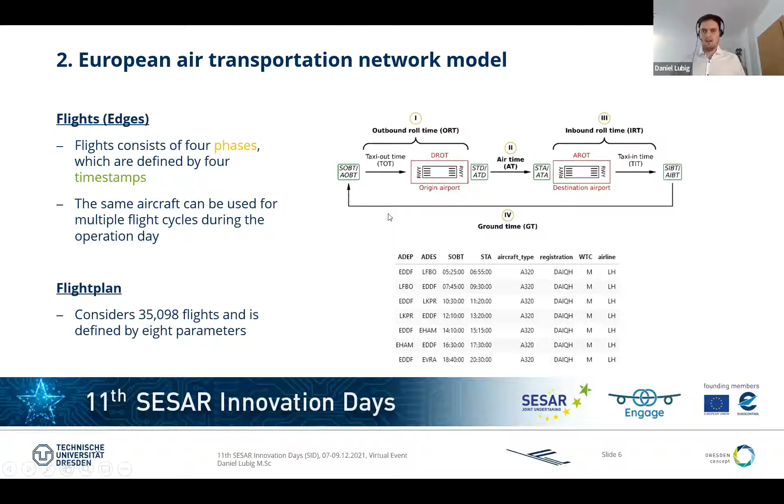So we all know our 4 phases for a flight. And now the question is, how long do these phases take? Let's start with the flight time. Within the data set, the actual flight times are reported. I will show you the flight times from London Heathrow to Frankfurt, which was flown with an A320neo aircraft, because it's important to consider the aircraft type. As you can imagine, different aircraft types have different speeds, and this affects the flight time significantly.

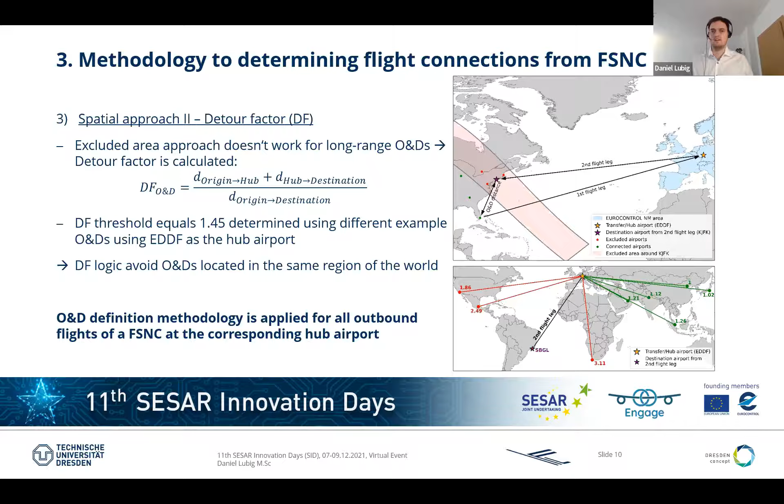Okay, we have our simulation, then we need to start the machine. I talked about the flight plan, so I skipped this part. We defined scenarios. The baseline scenario doesn't consider any capacity improvement. Scenarios 1 and 2 consider the capacity improvement at Frankfurt and at London Heathrow. And then we are checking 5 key performance indicators. For the airport performance, inbound delay, outbound delay, additional taxi out time, and the ASMA additional time. And for the full service network carrier, the connection rate, which is the rate between the fulfilled flight connections and the planned flight connections. And let us have a look at the results.

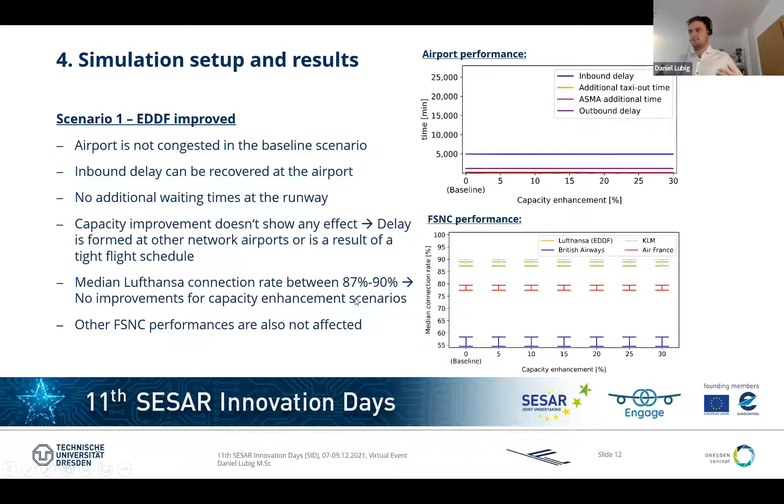So these are the more, I would say, boring results. Nothing happened here. And we can see Frankfurt is not a congested airport. So capacity improvement doesn't have any effect and doesn't improve the full service network carrier connection rate. All in all, this is the typical case of improving a system which is not congested. It doesn't have an effect.

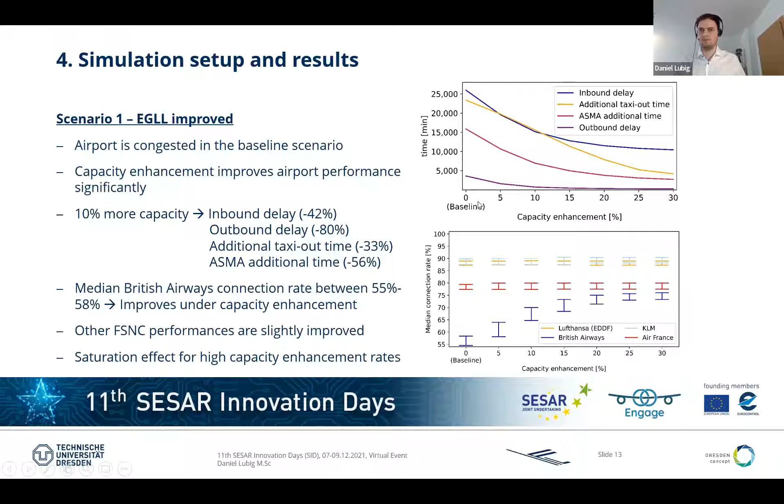Other full service network carrier performances are also slightly improved. It's hard to see here, but for example, KLM can also increase their connection rate because of their flights which are flying to London. They are improved, and these improvements spread a little bit into the network of KLM. In both cases, for the airport and for the airlines, we can see a saturation effect, which means a higher capacity enhancement doesn't have the same effect, especially when you compare this to the lower capacity enhancement.

So I will leave you with a short conclusion to answer the research questions. At first, the capacity improvement leads to airport performance increase if the airport is congested. That's important to state. The same occurs when you are looking at the local full service network carrier, and the performance of full service network carriers using the capacity improved airport as spoke airport are also improved slightly. But I would say the network effects are not that significant or not as high as expected.

So the small outlook: this is a basis to extend the methodology and to include the airline rules, for example, to add a delay cost analysis, or just to improve the European air transportation network model, because some assumptions can always be replaced or can be sharpened.

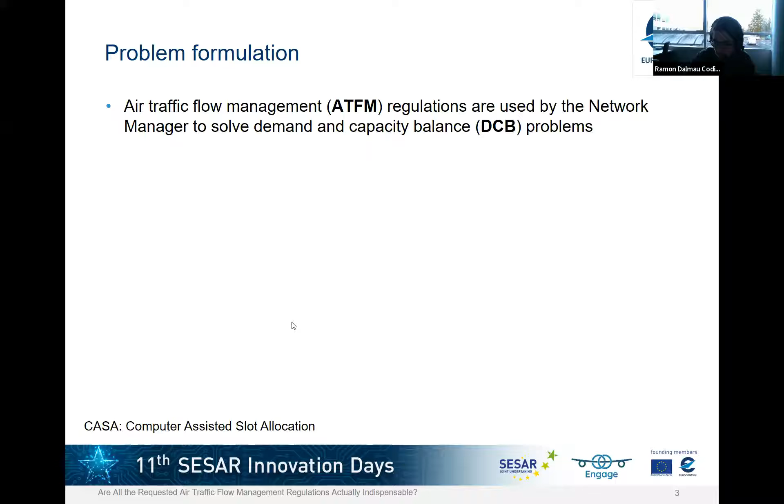So in Europe, the most common air traffic flow management measure used by the network manager to solve demand and capacity balance problems consists of imposing air traffic flow management regulations. In the following image, you can see a traffic volume which is associated with a sector in the southeast of Spain. This figure shows the demand, which are the vertical bars, as well as the capacity, which is the horizontal line along the day.

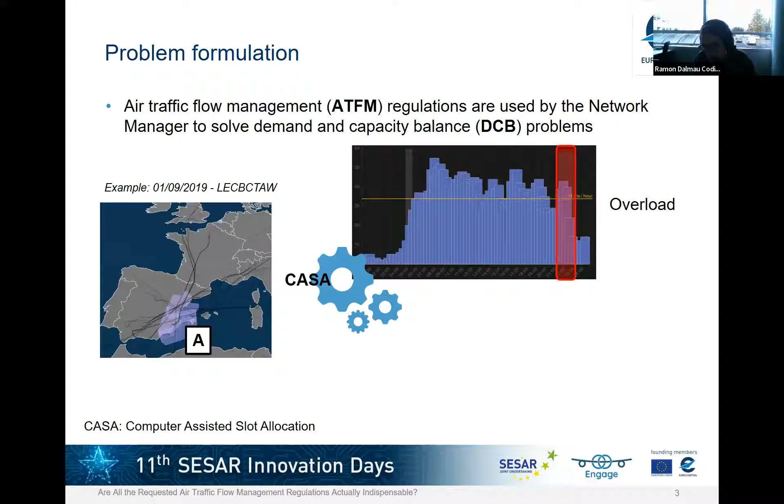In this particular scenario, you can see that the traffic volume was open in the morning and also at the end of the day. And a regulation was put in place at the very end of the day because the demand was above the capacity. Then the computer-assisted slot allocation system assigned ground delays to the flights entering in the time period of the regulation, on a more or less first come, first served basis with some exceptions, in order to smooth the demand. So as a result, the overloads were solved, but at the cost of some ATFM delay.

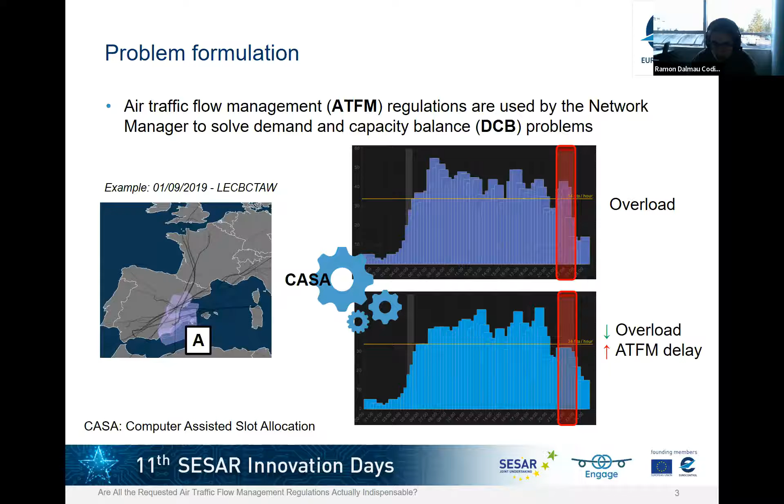When only one regulation is in place in the network, the problem is very easy. But during busy days, especially during summer, many regulations are requested by the flow managers, and these flow managers request the regulations independently. It's the network manager who has the role of coordinating the set of regulations in the network. But a flight subject to several regulations simultaneously is assigned the most penalizing, or the highest delay of all regulations affecting the flight, and then it's pushed into the other regulations with this delay.

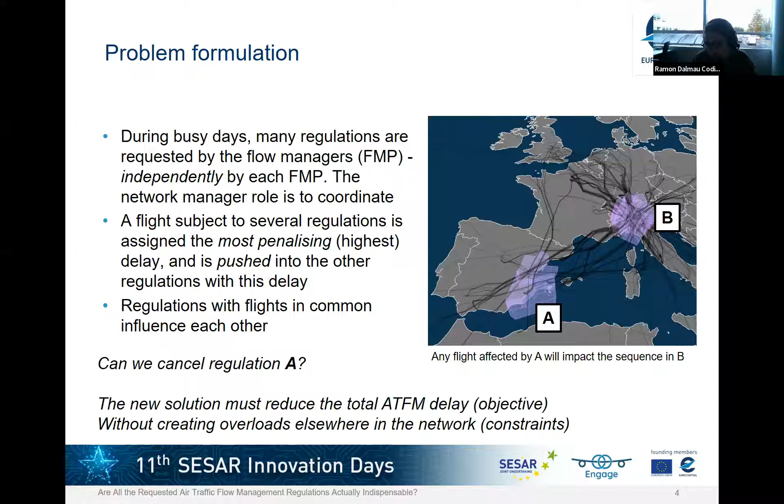But the new solution must reduce the total ATFM delay. This is our objective. But we cannot create overloads elsewhere in the network by removing or canceling regulations, and these are our constraints. So this is a binary combinatorial optimization problem, because we must decide if we keep or remove each one of the regulations that are proposed. With two regulations, there exist only 4 possibilities, so it's an easy problem.

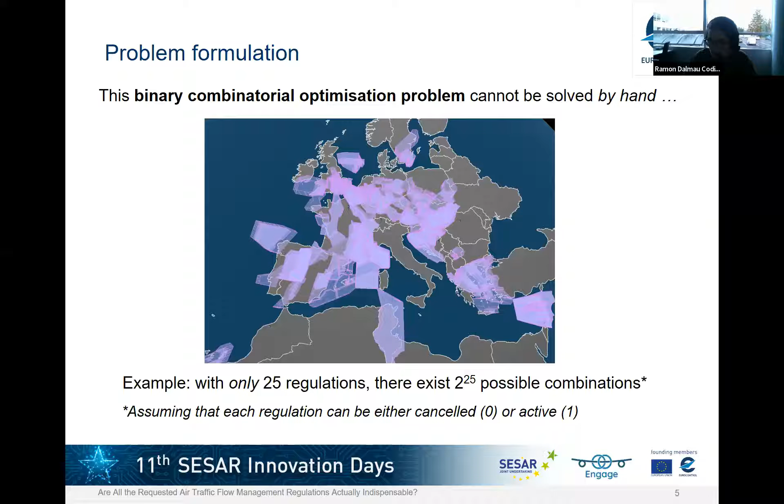But in practice, this cannot be solved by hand, because with only 25 regulations, for instance, and this is quite small, there exist 2 to the power of 25 possible combinations, assuming that each regulation can be either cancelled or active. If we then play with the parameters of the regulation, the combinatorial explodes.

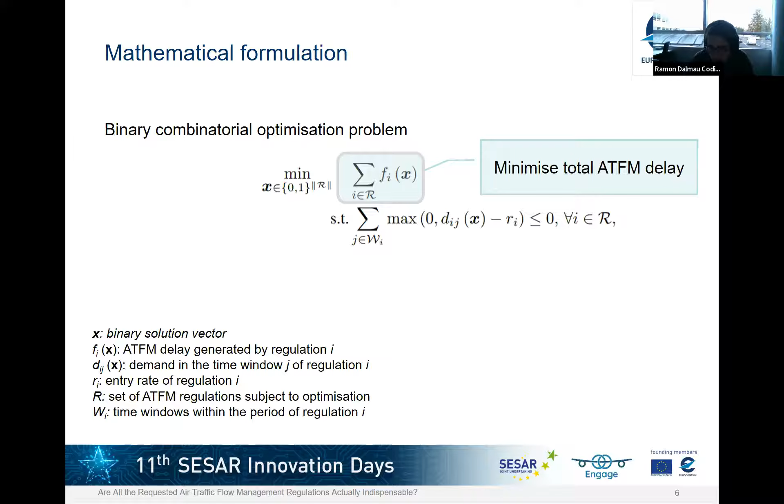In mathematical terms, we want to find the best binary vector, where each element of this vector corresponds to one of the regulations proposed by the flow managers, such that the total ATFM delay is minimized, where the delay created by each one of the regulations depends on which regulations are active, because regulations interact. And at the same time, we must not create overloads by canceling regulations.

And we must keep this to 0. And this is one of the constraints. The problem is that we cannot solve this optimization problem with mixed integer programming because the functions f, which is the delay created by each regulation, as well as d, which is the demand in the time period of the regulation, are very nonlinear functions of our binary solution vector. We cannot model this with linear equations.

Furthermore, if we consider the constraints as hard constraints, even one single overload somewhere in the network will invalidate our solution. But maybe the solution was very good in terms of delay. So we should consider these constraints as soft constraints, not hard constraints. We addressed this binary combinatorial optimization problem as a weighted constraint satisfaction problem, in which we just want to minimize the violations of a set of constraints.

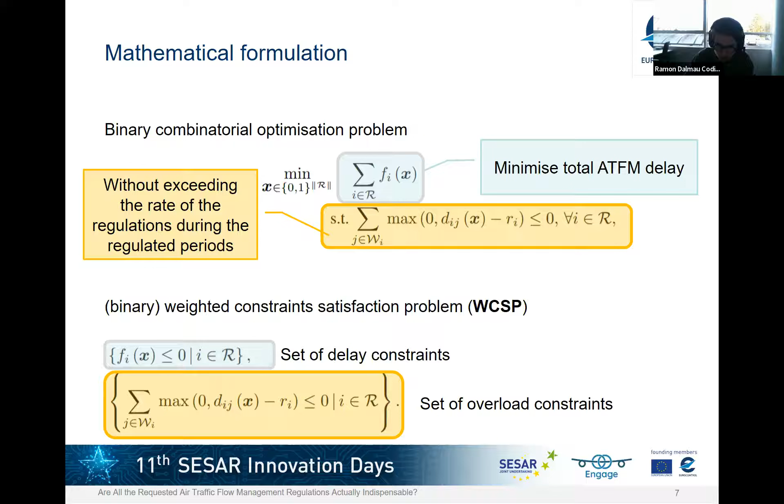In order to accomplish that, we just transform the objective, the minimization of the total ATFM delay, into a set of constraints, which state that the delay created by each regulation must be negative. We all know that the delay cannot be negative, and this is equivalent to saying minimize the total ATFM delay. So now we have a set of constraints composed of 2 subsets, the set of delay constraints and the set of overload constraints, and we just want to minimize the constraint violations. So we effectively transform an optimization problem into a weighted constraint satisfaction problem.

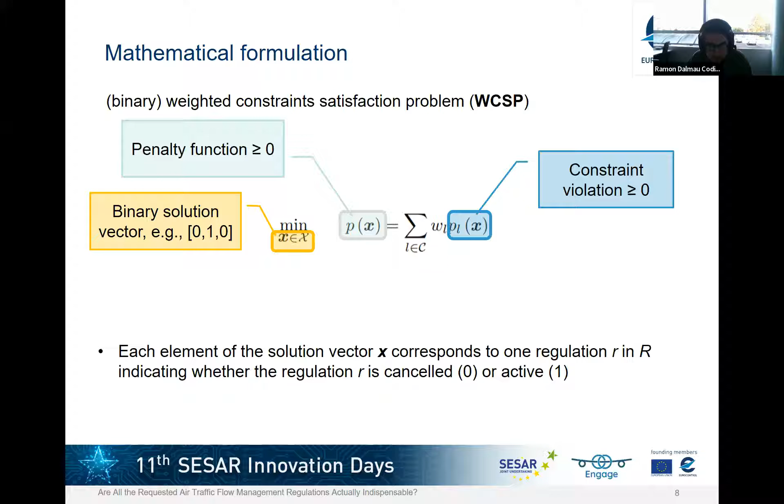Again, we want to find the best binary solution vector where each element of the solution vector corresponds to one regulation, indicating whether the regulation is cancelled, 0, or active, 1, such that a given penalty function is minimized. And this penalty function is a weighted sum of constraint violations, where the weight associated to each constraint indicates the importance of the constraint in the problem, and is a positive value, of course. And the set of constraints include the delay constraints and the overload constraints.

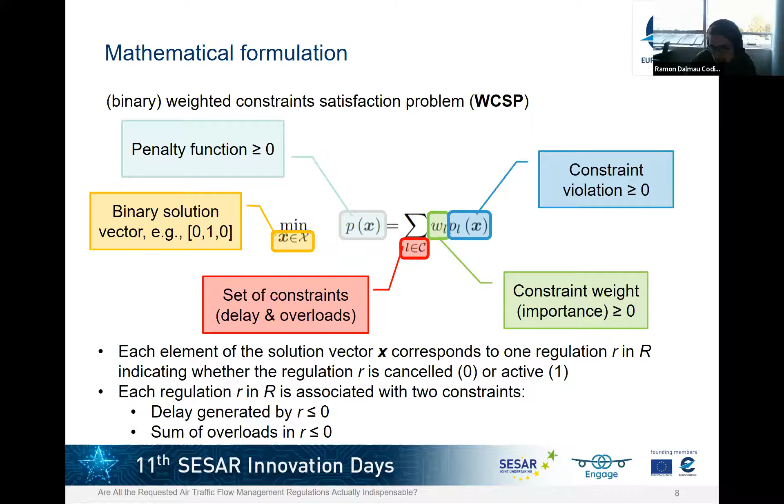And each regulation in the set of regulations that we want to optimize is associated with two constraints. The delay constraint that states that the delay of this regulation must be negative, and we want to penalize those violations, and that we cannot exceed the capacity. So the sum of overloads must be also negative. But now we have new questions. How to set the weight that is associated to each constraint? Because constraints with small weights will tend to be ignored by the algorithm. But too much emphasis will be placed on solving constraints with very large weights.

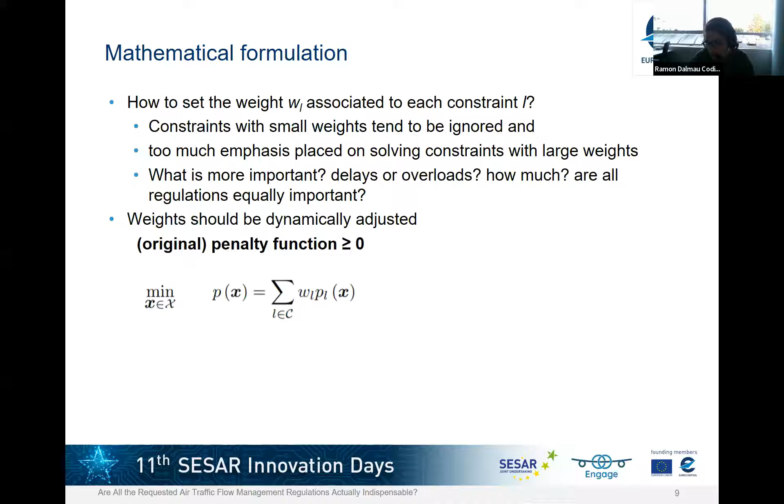Furthermore, what is more important, delays or overloads? We know that overloads, but how much? And are all the regulations equally important? Since we cannot answer these questions, we dynamically adjust the weights during the search, depending on the constraint violations. We'll see this later. So we have our original penalty function, which is the weighted sum of constraint violations, and whose weights are fixed. They are fixed, we cannot touch them.

And we have another function that is the evaluation function, that is the function that we use during the search. Okay, we are trying to optimize this evaluation function, and it is identical to the penalty function, and the only difference is that the weights are adapted. We can change these weights. We dynamically adjust these weights during the search. And these weights are positive, of course, and cannot exceed the original penalty weights.

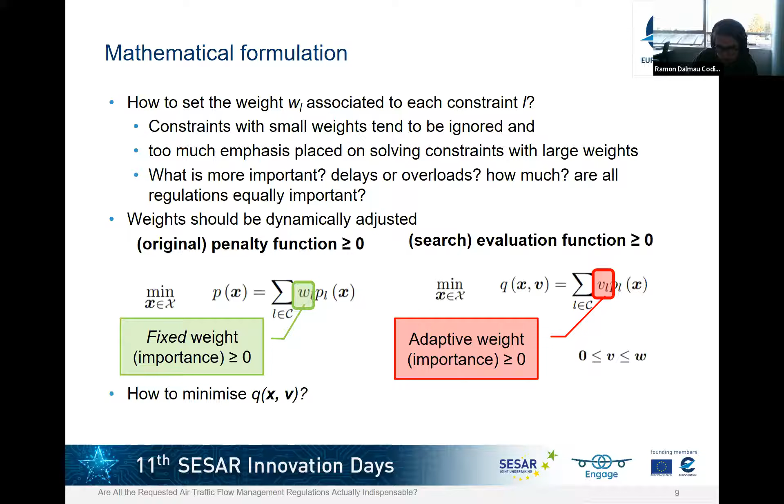But how to minimize this evaluation function? And secondly, and more important, how to dynamically adjust the weights during the search. For the first question, actually any optimization method could work. So you could use simulated annealing, genetic algorithms. In this case, we selected Tabu Search because we tried many algorithms, and this one was providing very good performance. For the second question, we are updating the weights based on the current violations. So if we see a constraint that is highly violated, we increase the weight. Instead, if we see a constraint that is not violated a lot, then we decrease the weight, giving more flexibility to the optimization solver.

You can find more details about the algorithm that we developed in the paper, but in short, we are repeating a Tabu Search round, which is a standard algorithm, in order to update the current solution with Tabu Search, in order to minimize the evaluation function. Remember that the evaluation function is identical to the penalty function, but with dynamic weights. Then, when we find a local optimum, we check if the current local optimum is better than the incumbent, where the incumbent is the best solution found so far during the search, in terms of penalty function, okay? And then we update the weights. Again, the Tabu Search and the penalty weight update routines are explained in the paper.

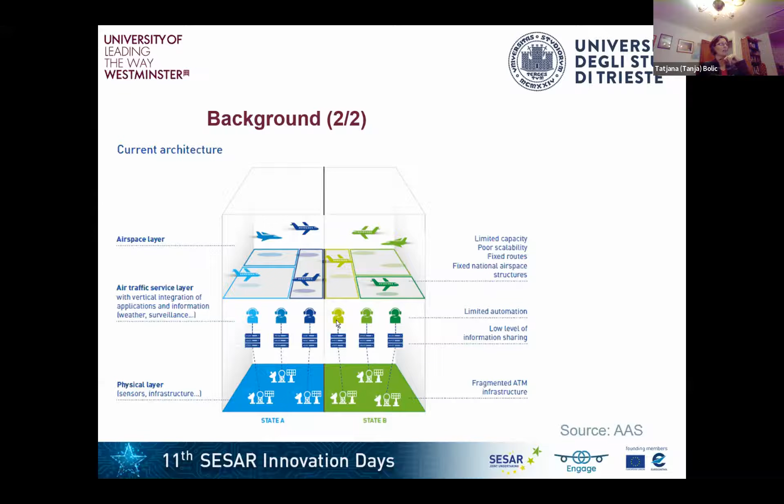The airspace architecture study is to go towards a slightly different version of the single European airspace system, based on modern technologies that could split the air traffic service provision from local infrastructure for data provision, thus enabling the decoupling of service provision from geographical location, which could enable this virtualization, where a service provider could use data from the common data services and practically control traffic anywhere. So that's the nice science fiction that we would like to explore, and how possible it is.

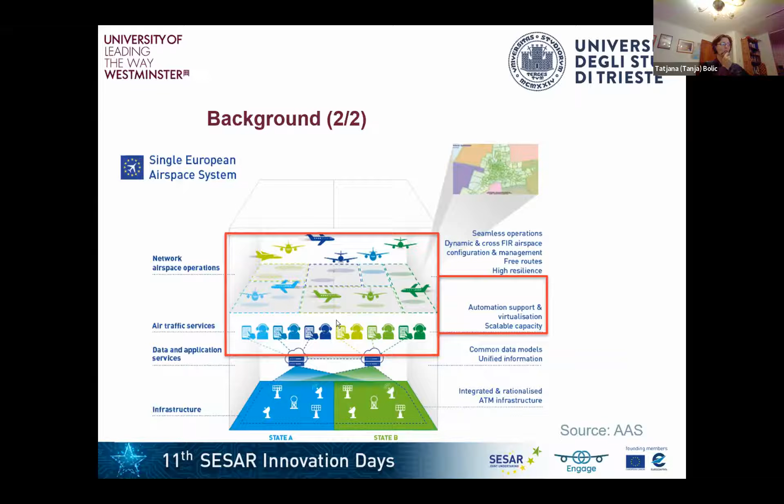So here we're focusing only on the air traffic services part, where we assume that this would be possible. Of course, this is a really big assumption because it assumes a lot of automation support to enable this virtualization that would then enable scalable capacity over the network.

So the objective that we address in this work is to understand the magnitude of possible benefits in terms of air traffic flow management delay reduction using the current ATC resources, meaning how the airspace is designed right now, the number of sectors, the number of controllers, of course, in a very macro vision. The contribution here is a mathematical model designed to assess delay reduction that could be achieved by different virtual setups with current resources. And I'll explain what is the virtual center setup.

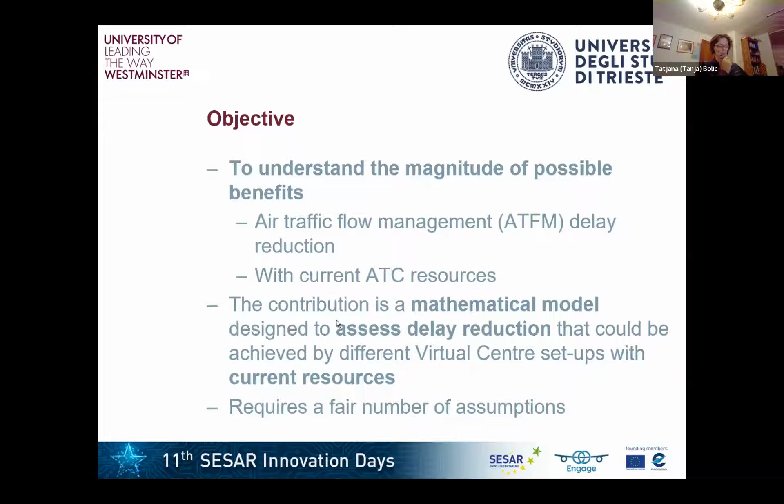Of course, it requires a fair number of assumptions. Some, at least in the current system, are quite science fiction. But this is something that the air traffic management master plan is aiming to achieve. So the virtual center here is a collaboration of a group of area control centers, from 2 and above, which is enabled by virtualization in provision of location-independent ATC services.

So here we assume that there is no need for physical consolidation of facilities, but it would require full technical and operational interoperability. And we assume the use of ATM data services from data providers. Another big assumption is that the ATCOs would have sector-independent licensing, or that they would be licensed on sectors of different ACCs. Here we are also exploring only ATC-C, which is capacity, and ATC-S, which is staffing regulation. So something similar to what Ramon was doing, although we do include staffing as well.

So again, this is the macro analysis. These are the assumptions, and we don't take a lot of nitty-gritty details into account in this model. Sorry, I went a bit far.

So to be able to formulate this model, we needed to create several model-related assumptions. An ACC has capacity issues when it generates capacity and staffing regulations. Staff at ACC-A can open a sector in ACC-B when the operational resources are lacking at ACC-B. Then ACC-A can open an additional sector at ACC-B when it does not generate ATFM delay. So you can help only if you are not currently generating ATFM delay, and also if the number of currently open sectors is lower than those in planned opening schemes.

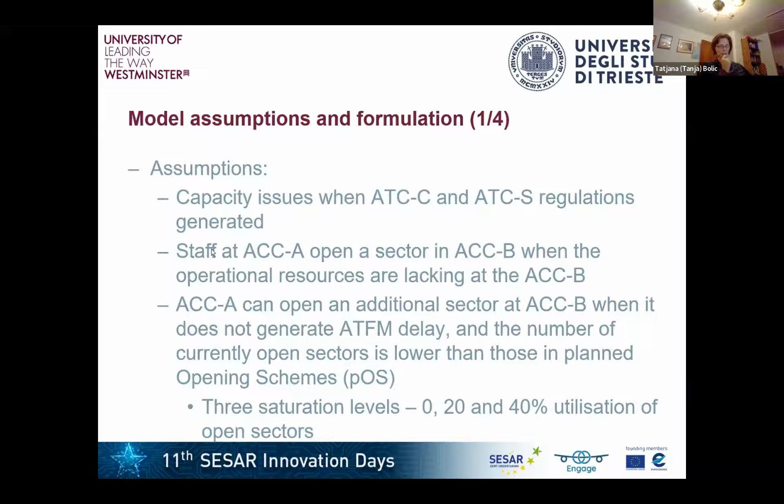So to explore this even further, we looked, during our use cases, at 3 saturation levels, 0, 20, and 40% utilization of open sectors, where 0% just means that the sector was not open, but we also take into account the sectors that have very low utilization, just to explore and see what could be done with those.

Other assumptions: additional sectors at ACC-A can be controlled by ACC-B if the number of open sectors at ACC-A does not equal the maximum number of sectors. So if all the sectors are open, there's no place where another ACC can help. And individual sector capacity is expressed as average sector capacity per ACC. So for each ACC, we calculated average sector capacity.

So to be able to formulate the model, we need to introduce a few sets. The first one is the set of ACCs that we are looking at, which can be from 2 and higher. Then the set of time intervals in the time period we are analyzing. The time intervals are set to 1 hour, and the time period, you'll see later, is 2 months, more or less. Then we have the set D_it, which is the set of delays of ACC i at interval t. And then the set D_jt^i, which is ACC i's total delay that ACC j, with whom ACC i is collaborating, can absorb at interval t.

We have 2 sets of variables: X_ijt, which equals 1 if ACCs i and j collaborate at time t, and D_ijt, which is the minutes of delay of ACC i that can be absorbed by ACC j at that time. So the objective of this model is to find the collaboration configuration at each time interval that minimizes the total delay, subject to 4 sets of constraints which are linked to those previous assumptions: at each time t, an ACC can collaborate with only one ACC, and it cannot collaborate with itself.

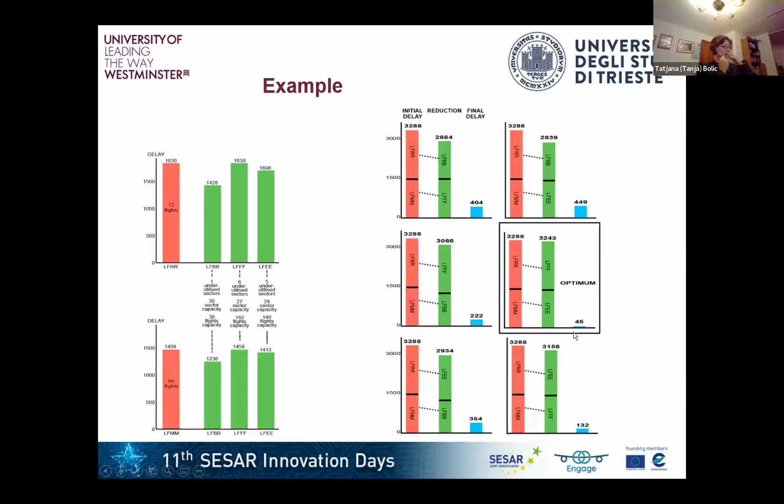So to go now to our use cases that we checked with this model. We used the data from two AIRACs from Eurocontrol's DDR2 data that was kindly supplied by Eurocontrol to Natalia. From there, we took sectors and their saturations, the delayed flights, the ATFM regulations, configurations in place, the opening schemes in place in those days, sector capacity. And then another set was the planned opening schemes that come from the Network Operations Plan, again kindly provided by Eurocontrol.

Scenarios that we looked at were to see what would be the delay reduction if we look at different geographical extensions of the virtual center. To begin with, we would go with a single NSP, with a neighbor, functional airspace block, and Single European Sky. So, for example, for the single NSP, we looked at DFS and DSNA, because in that period they were the NSPs that had the highest delays, and they're also part of the functional airspace block FABEC. So that made the analysis a little bit easier.